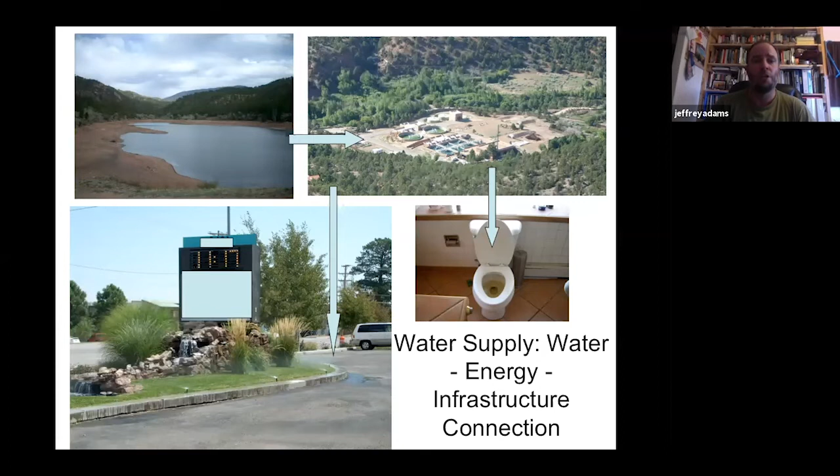At the same time as all those water supply connections going on, we also have this other phenomenon happen on a lot of our landscapes where, because we've graded our land, we've paved it, we've degraded it with overgrazing, overlogging, different suburban development patterns, whatever the underlying issues are, now when it does rain, it ends up mostly running off, often causing erosion and water quality impairments, and then leaving the upland areas dehydrated.

So now the areas that we need the water in these landscaped areas, we now need to tap into that other infrastructure intensive system to bring irrigation water to keep these spaces going, and then trying to mitigate the down gradient issues, whether it's flooding or erosion.

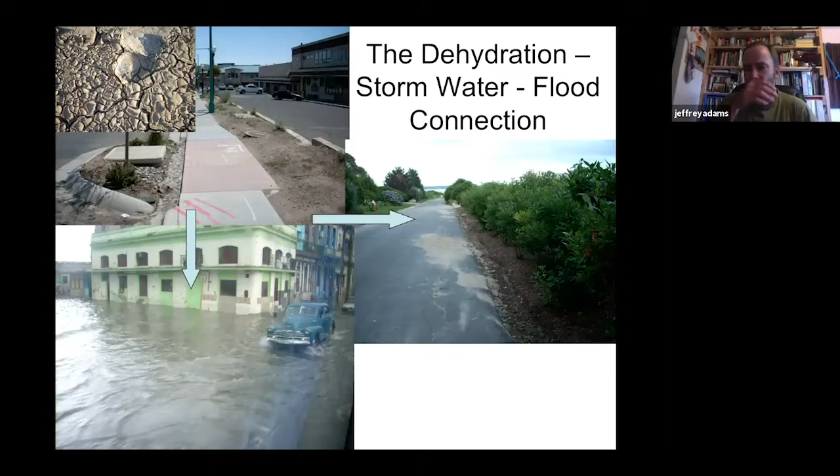And that all leads to a whole range of water quality impairments, and different localities have different quality impairments. Here locally in Moab, we have some issues with temperature, and that's partly shading of the creek, and we also have total dissolved solids and selenium and sometimes E. coli, and all of those can be linked to stormwater runoff. Some of that mineral is naturally occurring, and erosion is a natural process. It's just the scale and the pace of that is something that us humans have drastically increased in many situations.

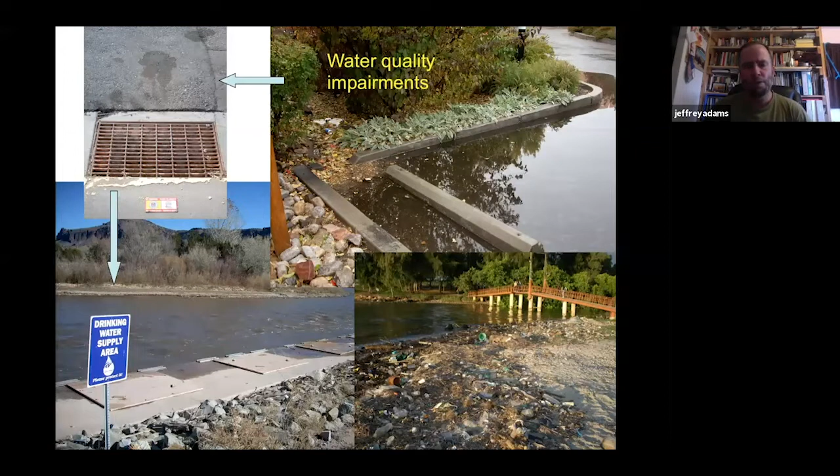Some other really practical reasons to the homeowner, to the building owner, to do water harvesting is to protect your buildings and infrastructure. If you look closely at the foundation of this house here, you can kind of notice that water staining of where water, no gutter, just sheets off. The patio is actually tilted back towards the house, so that water just sits up against the foundation of the house whenever it rains, just causing issues, causing damage. And then nearby, there is a shrub that has died because the irrigation that it was being provided probably wasn't enough, or some other factor.

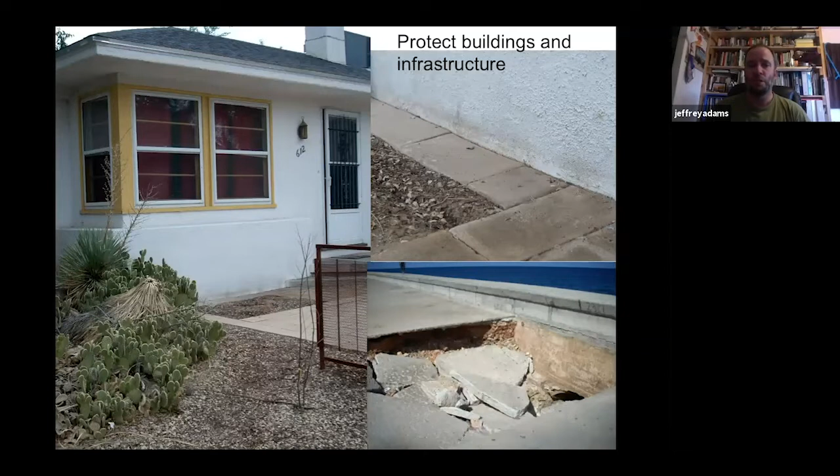And so if we start to connect these things and start to really look holistically, we can start to say, wow, I can turn this problem of this water causing damage to my building or eroding out the side of my road into an opportunity to put that water into a place where it can soak into the soil and feed the vegetation that we want to have growing.

So in general, unless it's a tree that's adapted, like a cottonwood or a willow, to have standing water right up against its trunk, we generally want to keep the root crown, right where the tree comes out of the soil and starts to become the trunk, we want that to stay high and dry, and then we want that water to be where the roots of the tree can just tap into it, so we're not damaging our landscape.

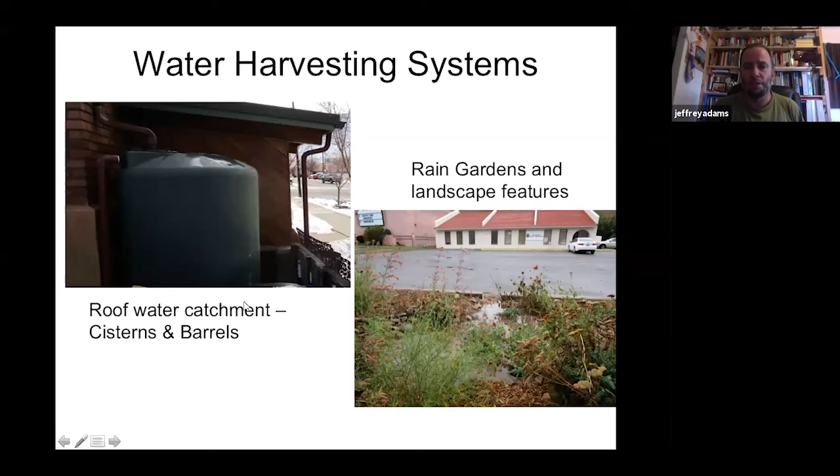So for both systems and for integrated water harvesting in general, you really want to start with a sense of place. Where are you? What are you working with? Because that's really going to drive what some of your opportunities are and what some of your other design considerations are going to turn into. So it really starts with climate. What are your patterns of precipitation? What's your annual rainfall? How is it distributed over the seasons?

What's your peak rainfall intensity, or the most you would typically expect in what the engineers would call the 100-year storm. And so we want to know some of this information from a water perspective, along with all of the other climate-based gardening info of climate zones, first and last frost dates, those sorts of things. But from a water harvesting perspective, we're really starting to look at, when does water come to me free from the sky that I might be able to put into use and work within my landscape?

And then the other huge layer is your site. What are your specific site conditions that you're working with? Where are your sources of runoff related to your gardens? How much water do you need? What type of plants do you currently have, and what type of plants do you want to have, and how much water do those need?

And so as we start to look at some of these together, that site assessment also starts to look at, what are your soils like? If you have heavy clay soils, you might want to do stuff that has a shallower ponding depth and is spread out over a wider area, versus if you have a loamy soil, you can fill it up more and it'll soak in a reasonable time frame.

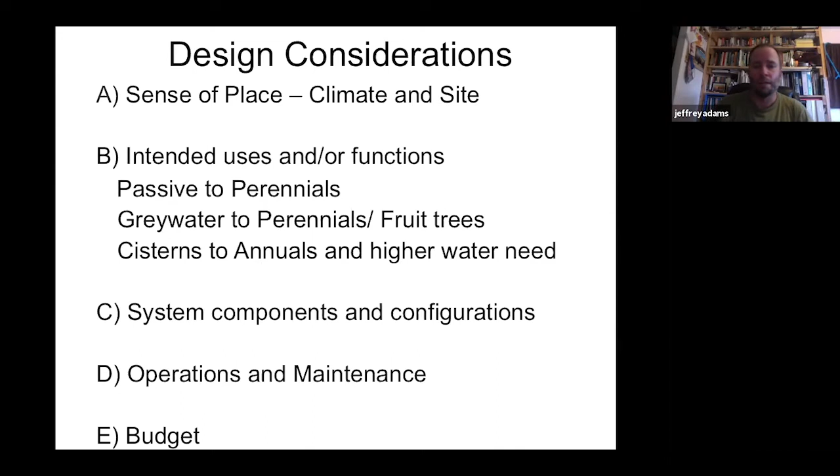So one of the key principles or concepts that I start with thinking about this stuff is the concept of a watershed. So at its classic definition, a watershed is a geographic area that drains to a common place, usually a river, an estuary, a bay, a lake, the ocean, something like that.

For the sake of water harvesting on our own properties and in our communities, we can really start looking at the sub-watersheds or the watersheds of a roof or our site, and that really helps us to hone in on, as these red arrows show, each place you have a downspout, there's a certain area of roof running to that downspout, and we'll get to do a tiny bit of math here in a second.

To calculate, we can say, oh, on this downspout A, in a 1-inch rain event, I get 500 gallons, and that information goes into how I size my tank and/or my earthworks. And then on the other downspout, oh, that one gets about 400 gallons.

And so we can start to break up our properties into these little drainage areas so that we can develop appropriate strategies for each watershed of our roof, or each watershed of our site, and start to match our sources of runoff, our roofs, our driveways, our steep slopes, any of those things, to our sinks, our places that we need that water. Where can we direct water that's running off of point A and send it over to where we need it in the landscape.

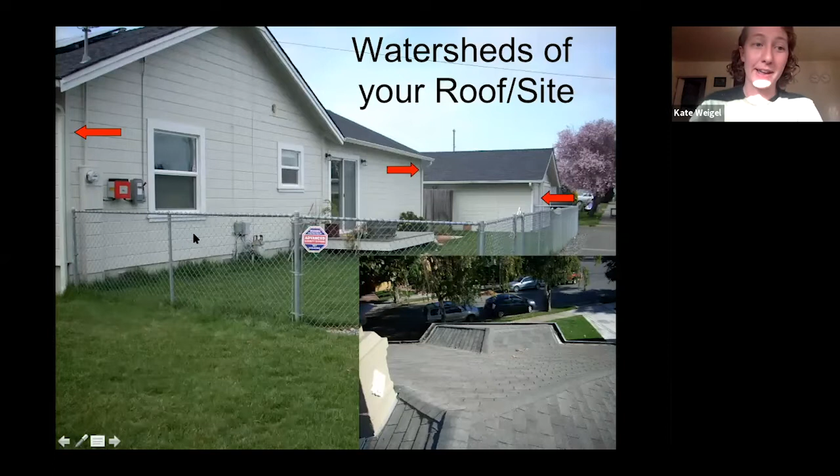Jeff, a question from a participant. What if there's no rain gutters or downspouts on the house? This is the case with my house, so I think this is a great question. Yeah, totally. So there's pros and cons to that. So that would be what we would generally refer to as sheet flow, meaning that that water comes evenly off the entire length of that roof area.

If you look closely, there's probably a splash area that might be a little bit indented and might have a little bit more rock showing right where that water comes off the roof and hits the ground, depending on what it lands on. So some of the strategies can be, first, there's the consideration of, is it worth putting a gutter on? Like, do you want to concentrate that water someplace that you can channel it to?

There's also ways you can shape the splash area that that water is landing on. I've seen people shape it and essentially put in a French drain type of thing, or even just a surface contouring. So when that water lands there, it starts moving in the direction that you want it. And that, of course, assumes that there's some slope. So the flatter your property is, the more challenging getting some of the elevations right are to move that water.

From a soil erosion standpoint, if guttering's not an option or not desired, you can even just put a layer of gravel, something to break up the impact of the raindrops so that they're not breaking apart your soil and causing it to splash on your house possibly, and then run off and erode.

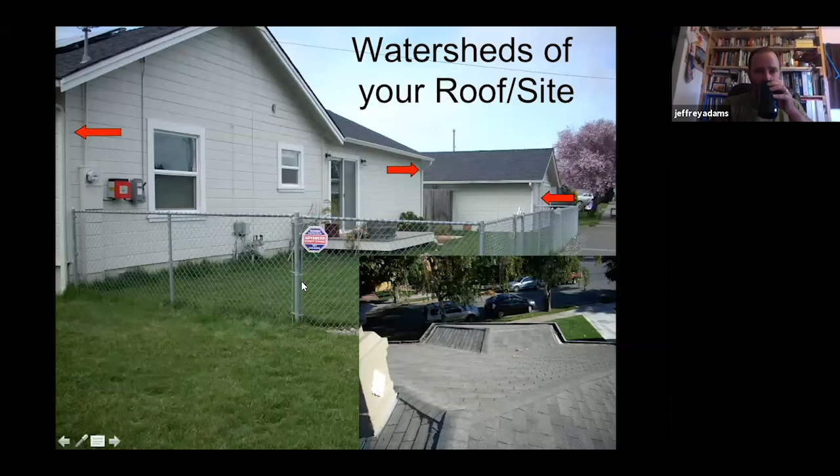So here's probably the funnest slide of the whole presentation. It's the one where we get to do math. I put this up because in a lot of ways, being able to quantify how much water, and these are estimates, it's not an exact science. The math is actually pretty exact in terms of converting to volumes, but the rainfalls that you receive in a given storm, and how quickly they come, or whether they come in multiple pulses, all that sort of stuff is going to be a lot more variable.

But this can give you a sense of, and it holds true for any surface, whether it's your roof, your driveway, your garden, the parking lot next door. You can use this to get an estimate of how much water you can reasonably expect from that surface in different size rain events and over the course of the average rain year. And so the formula is pretty straightforward. It's the area, so in square feet, so that's just your length times your width.

For a house, even, you've got a sloped roof, but you'd look as if you're looking down just at the footprint of it, because that rain generally is falling pretty straight down. Of course, the wind blows it too, but for the purposes of this calculation, it's the bird's eye view footprint of the surface in square feet times the inches of rain you want to solve for. I usually start with 1 inch of rain because it's easy math and it gives us a good sense.

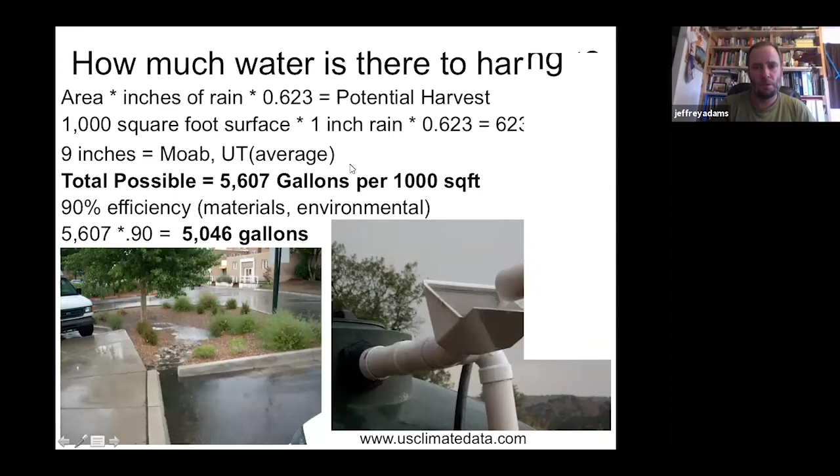So now to look in a little bit more detail at some of the different techniques that fall under this passive category, this earthworks, rain gardens category. I'd refer everybody to what I think is probably the most comprehensive resource out there, Brad Lancaster's Rainwater Harvesting for Drylands, volumes 1 and 2. I listed 2 here because it gets into a little bit more of the technical details, whereas volume 1 is a little bit more of the theory and principles and bigger picture stuff, but they're both incredibly good reads.

And then I would also recommend people look at some of the stuff that the Watershed Management Group has. They're out of Tucson, Arizona, and they've been doing a huge amount of work and innovation in these fields for a bunch of years now.

So above the line, basins, berms, swales, terraces, and we could think of some other terms that would fit in this technique list too, but those essentially refer to different ways of physically shaping the land to be able to hold on to some amount of water. And then below the line, the healthy soils, mulch, and vegetation, those are really the biological components that end up driving the system and making it function properly over time.

And really a primary goal of all of this is to build healthy soils and to turn as much of your landscape into a sponge that can soak up, hold on to, and slowly release that moisture and any associated nutrients over time. And then mulch is essential for helping to feed the soil. It's good for weed suppression, and it also helps to minimize evaporative losses, meaning as the sun and the wind go over a soil surface or pass through plants, some amount of water is lost through that.

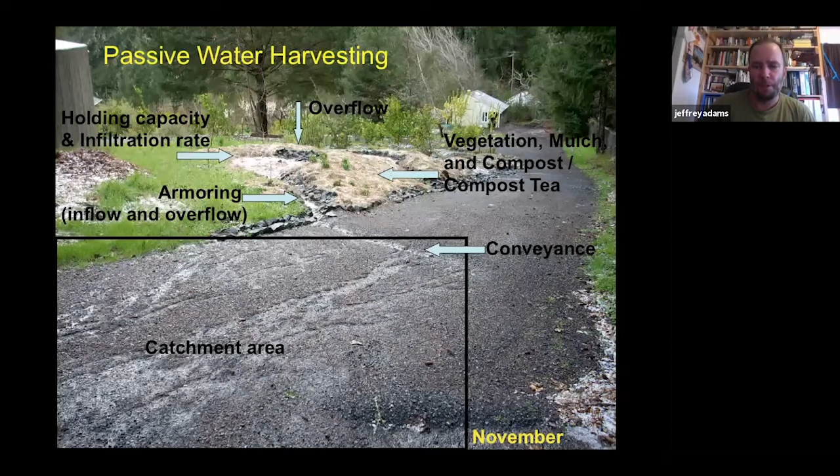It works pretty good. But there it is in November, and then the following summer, after a wet California Mediterranean winter, so different in each climate, but we've had similar results to this here in Moab. We just typically need to provide more supplemental irrigation than in some of the wetter climates. But that's kind of the premise.

And then the species we choose is really up to the individual designer and property owner. My preference is often multifunctional stuff, ideally things that I can eat or get culinary or medicinal herbs from, and then also tons of flowers and pollinator plants. And it's nice to put in shrub thickets for bird habitat and really start to turn our landscape into both part of our infrastructure, but also an ecosystem of itself.

As we get more of these distributed capacity water harvesting ecosystems, we can really start to have cumulative positive impacts at a neighborhood or a community scale in terms of things like drought resilience, pollinator habitat, food production, stormwater management, water quality, localized flooding, these different issues that a lot of communities and neighborhoods face. And not that this is a silver bullet and will solve all of those every time, all the time, but it's a major part of our packet of solutions.

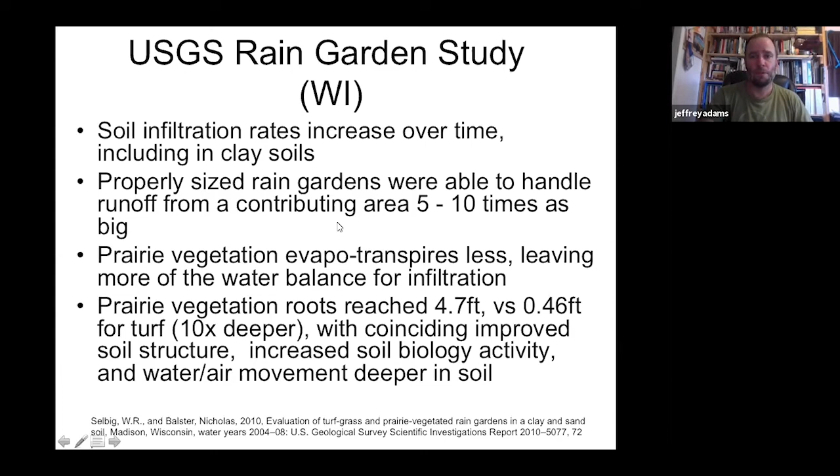So then there's berms. So that's kind of where a basin is, you're indenting into the ground. A berm is you're building up off of the surface of the ground. And where those come in is sometimes you just don't want to dig. Sometimes you have root systems or infrastructure or shallow bedrock or some number of reasons that you may not want to dig down, but you still want the function of being able to create a physical structure that causes some amount of water to pool up and soak into the soil.

It can also be very useful if you're trying to get some additional plant height, in terms of creating a windbreak or a privacy berm. Sometimes it's nice to get 1 foot or 2 or 4 feet of earthen berm up to then put your plants on top of, so that they start up higher and it takes less time for them to provide some of those other windbreak privacy functions.

This particular set of pictures is a colleague of mine in New Mexico, Christian Miley, and he has been doing pinyon juniper thinning and re-veg for a number of years. And what he's come up with is he does the thinning both for forest health and for fire hazard reduction, chips that material, and then makes these approximately 1 foot high, 1 foot wide berms on contour with the wood chips. And these would be in areas where it's low flow energy.

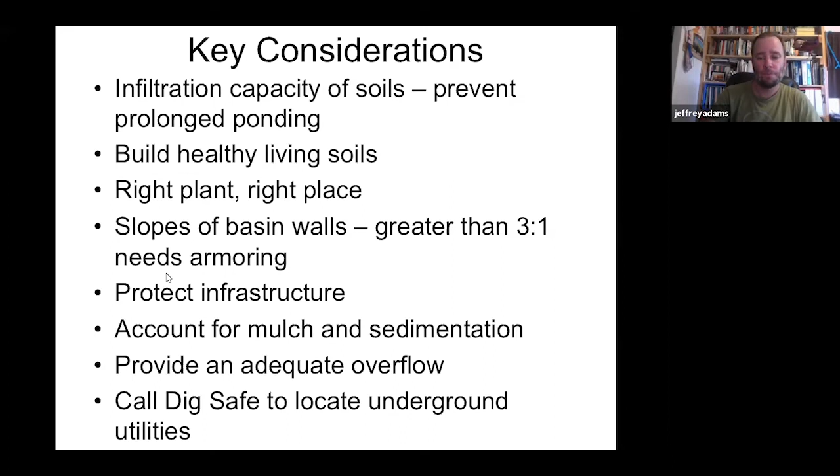We have a couple more questions. All right.

So one of the questions is, if there is soil erosion around the house structure, should I just add the small gravel on top, or should I add soil there and then gravel? Honestly, that depends on your finish grade. In general, you'll have the baseboards of your house, whatever stem wall or concrete footer, and you usually want about 4 to 6 inches between your soil grade and the bottom of the trim or the walls of your house. So it kind of depends on where you are in that.

If you're a foot low, then yeah, bring it back up. But if your grade started out high, then it might even be that you carve a little bit more away and then put down the gravel. So it depends, but that 6 inch gap from finish soil grade to bottom of house is a pretty good rule of thumb for deciding on that one. And then another question: do you put the berm or swale on the high point or the low point? So finding the level spot all the way across, is that correct? Yeah, good question.

So essentially you want your berm, and then your water harvesting, it could be a swale if it's below grade, but the bulk of the earth is going to be on the downhill side. Your water harvesting that you want level is going to be just up from that, and then you want the top of your berm, or usually when you dig a swale, you're creating a little berm on the downhill side with that dugout material.

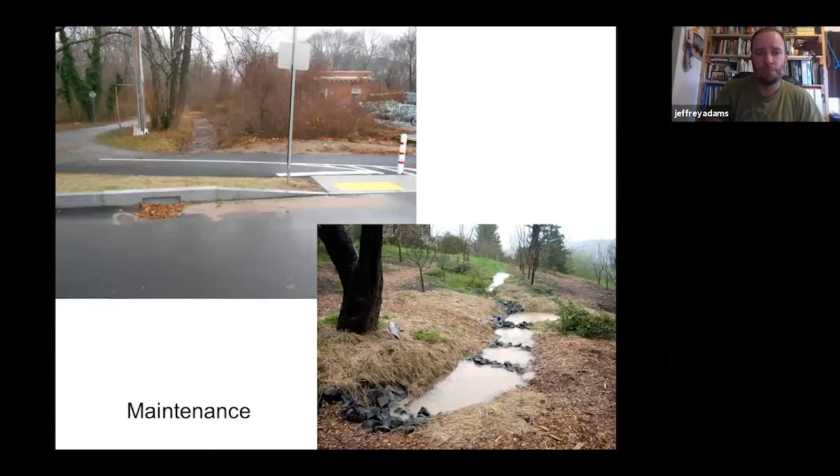So then there's also some challenging site conditions where it may not be appropriate to do passive water harvesting. That could be really steep and unstable slopes, if you're in an area that has dissolvable soils that could form a sinkhole, or expansive soils that could cause some shifting. Areas with really high groundwater within a couple feet of the surface, there just might not be enough soil volume to soak that water in before it hits the groundwater. Same with shallow bedrock or a low permeability area.

Areas of heavy compaction, that's a little bit easier with a machine, or if it's small enough, a broad fork, you can loosen some of that, but it poses a little extra challenge. And then polluted areas and brownfields, we don't want to add a bunch of water onto polluted soils and potentially push that pollution down into an aquatic system. So just some things to keep in mind.

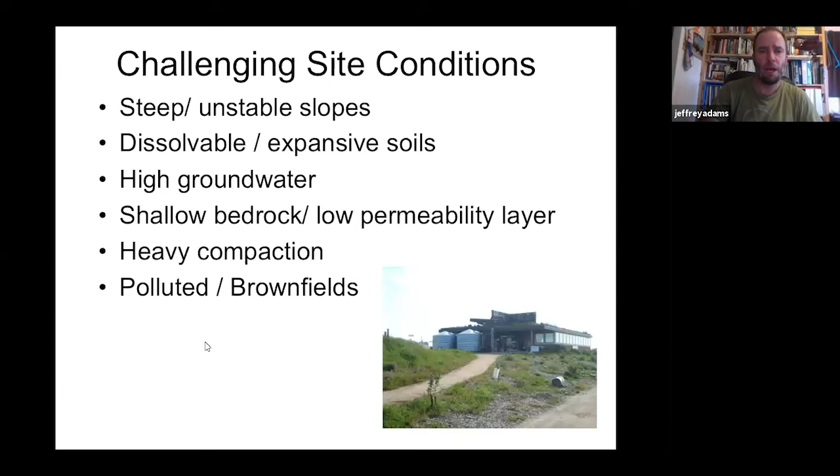There's just a picture of a curb cut with some pretty dirty looking stormwater running into it. And then here's a property I've been working on outside of Moab for the past, I think this is year 6 now, 5 or 6.

And when I started working there, they had in this top left picture a 100% code approved, engineered, designed and stamped detention basin that was sized to meet the needs of the site, and is essentially this big old pit in the ground with an emergency spillway, and you can't quite see it in the picture, but there's an 8-inch pipe that goes out the bottom.

And that pipe drains, if you look at the bottom right picture, so all the runoff from this barn and some of the gravel utility areas around it would go into this basin, and it would come out the 8-inch pipe, and it was carving this gully straight down the middle of the property after just a couple seasons. And then it was going over this big embankment down to the creek, which was starting to head cut and really blow things apart. And so I got brought in to see what we could do from a permaculture perspective.

And what we came up with was, it's hard to see in this picture, the next one will show it a little bit better, but this is that same angle. We were able to get code approval and have that same engineer stamp the distributed basins that I put in here to show that they had the same volume, and this organization was able to fill in that big detention basin and start to use it as part of their activity areas for the groups they have here. And we were able to start to re-veg and manage that stormwater.

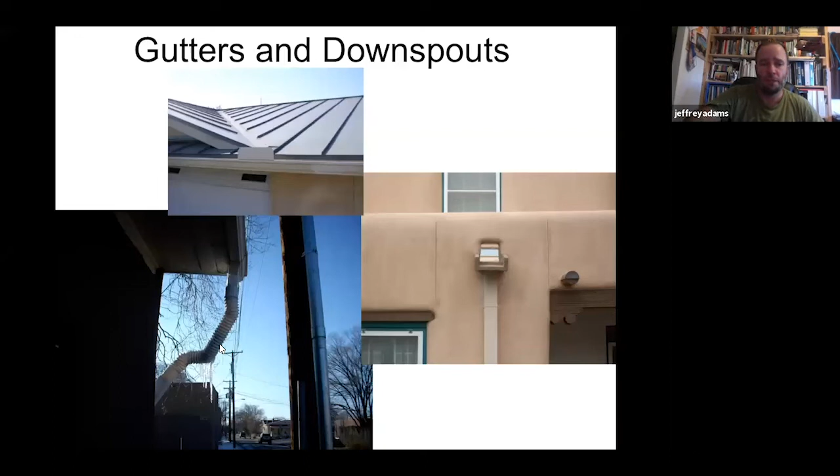Living roofs, all the rage. Living gutters, not so cool. And so any house that has gutters, it's a potential maintenance issue to just keep those free and clear of debris, especially if you want to store that water in a tank for later.

Here's a couple options of the pre-filters. So the upper left is that debris excluder. It's really nice because it's there, visible. You can put it at eye level or whatever, and it's slanted, so some amount of the debris naturally sloughs off, but you can walk by and see it and say, oh, I gotta clean that off, and tap it off real quick, as just kind of a part of walking by things.

And the bottom right is a basket strainer. That's often used for a lot of underground tanks, but it can also be used for above ground, and they sit inside the top of the rain tank, and then the water comes in, like in that last picture here. You could put that basket filter right in there and then have that water come in that way.

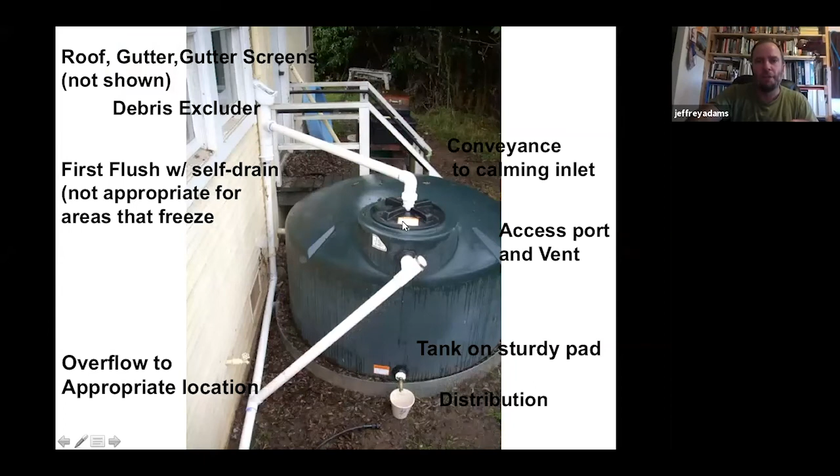Those are kind of two of the most common options. There's some other products available, but those are the two general types of pre-filters. And that's just a really important thing: good quality water going in is better quality water coming out.

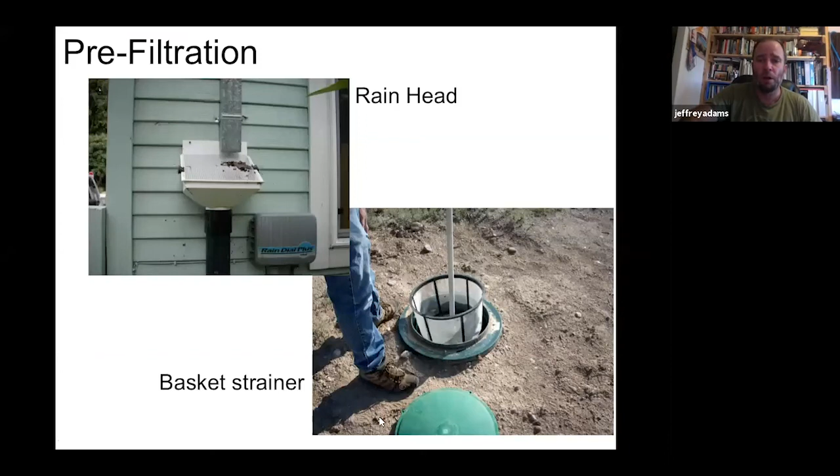And so here's just a couple different tanks. Dry conveyance, essentially this pipe drains dry after the rain is done, so there's no chance of that freezing. In warmer climates, you can do what's called a wet conveyance system, where you use the self-leveling properties of water to actually move water down across an area and back up, but not appropriate for areas that freeze. So I've stopped including that in a lot of my presentations, but just know that that option is available if you're in an area that's not prone to freezing.

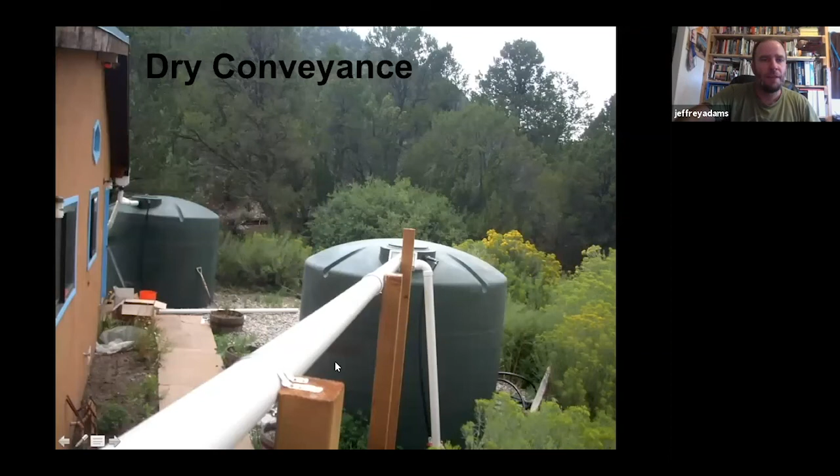And then tank types, these polypropylene are the most common types, and those ones that are made to be buried, and then all different sizes and shapes for above ground. The bottom right is the USU Moab permaculture campus, where they've got these slimline tanks doing some roof water catchment that feeds into their rain gardens. And so there's a whole range of sizes and volumes that you can look into to really customize your need.

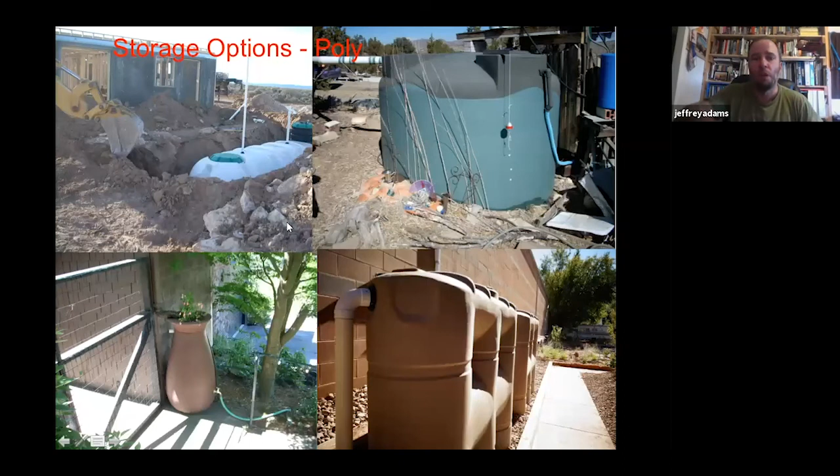The one word of caution is that if your tank is not rated to be buried, it's not recommended to bury it, because like this upper right tank, those walls are flimsy. They're not designed to have any soil loading on them, where this upper left tank is designed to be buried and has ribs and is engineered to withstand up to 3 feet of soil on it.

Then there's also different corrugated metal tanks. They usually have a liner on the inside so that the rainwater is not corroding the metal, but there's a bunch of different sizes and shapes of those. And then you can also make your own concrete or ferro cement tanks. And especially in larger volumes for some of the bigger commercial projects, there's different fiberglass tanks as well.

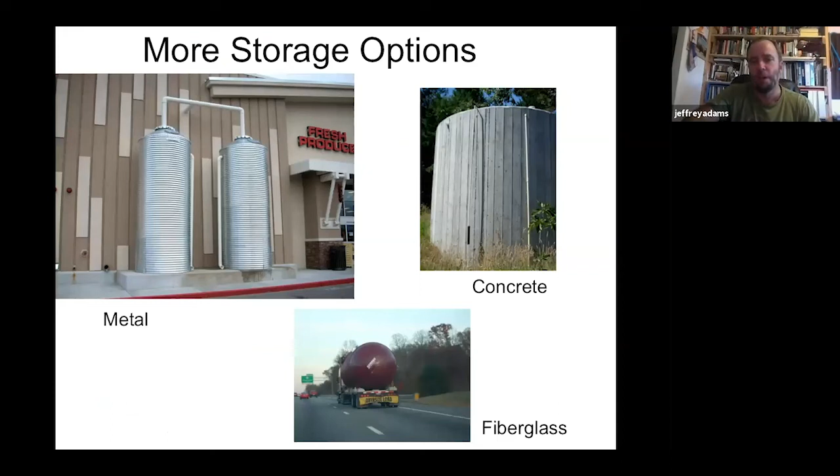For underground stuff, again, making sure it's rated to be buried. You've got to have your access to be able to get in there and service and maintain it, and you want that above grade, so you're not getting water flowing into it. You've got to overflow to daylight, and then you've got to bury the bottom of the tank and all of the pipes below your frost depth, and then rated for whatever loads.

They do make some that you can drive and park on, and others that you can only pile a certain volume of soil. And if you have high groundwater, you might need to use what's called dead men to prevent it from essentially popping out of the soil due to the buoyancy.

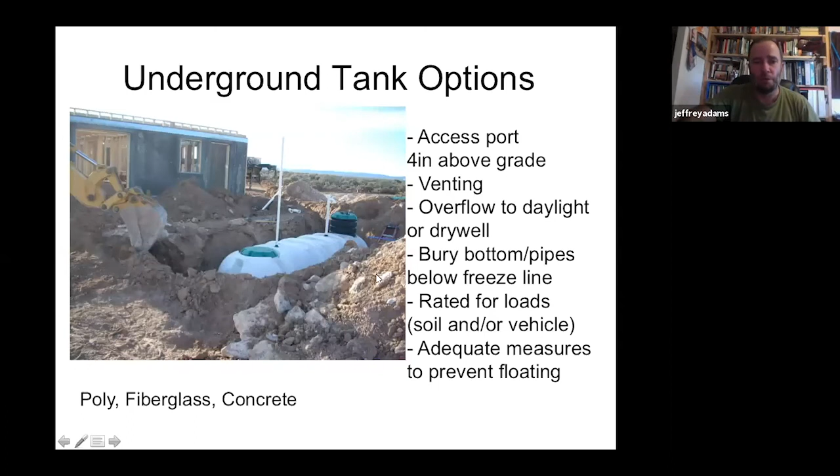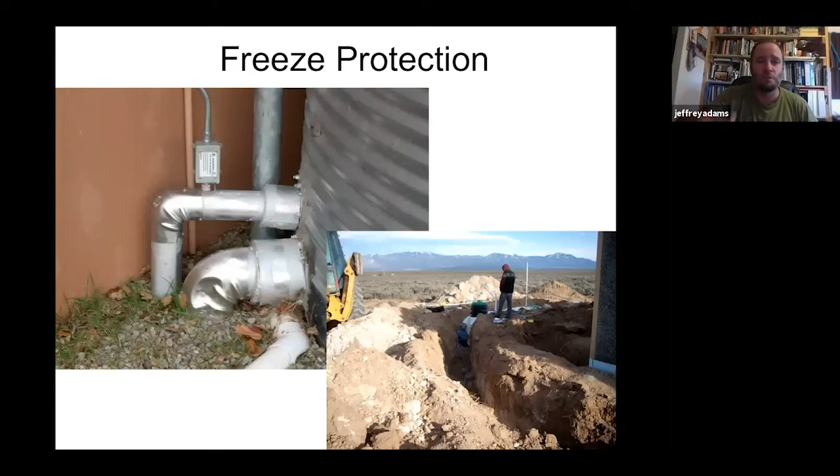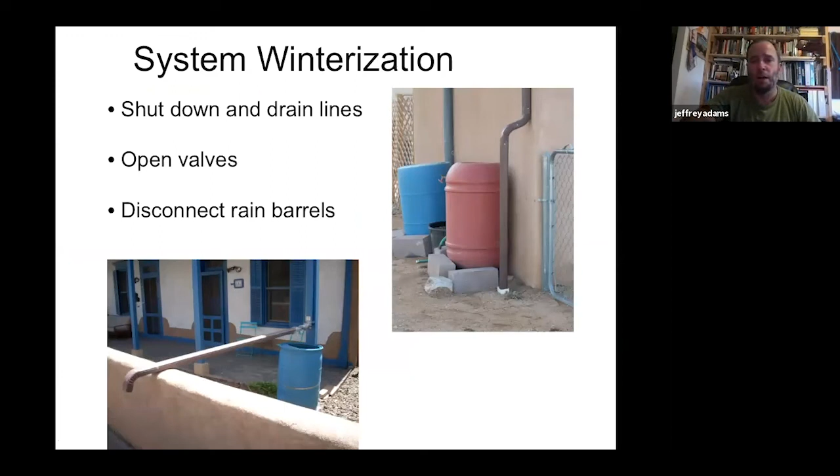Some different frost protection: heat tape is one option, burying stuff below frost depth. Sometimes people just disconnect their system in the winter and direct it straight into a rain garden. So there's pros and cons to all of those, and it's going to be a situational thing. And so here's examples of just disconnecting these rain barrels and putting that water into the existing stormwater management system or out into a rain garden. And that can be done opening valves or just fully disconnecting them.

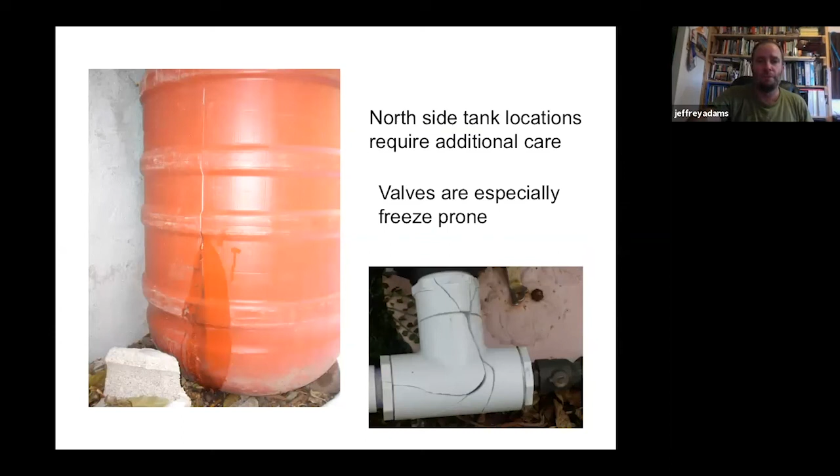And there's one that wasn't disconnected, and it actually split at this seam because it was on a north side of a building and just froze and popped the tank open. And same with your fittings, and your outlet valve at the bottom of your tank is generally going to be your most susceptible to freeze damage, so just pay attention to that.

And then yeah, the overflow's got to be the same size or bigger than all of your inflow piping, because you don't want to have a big pipe coming in and a little pipe coming out that can't move all the water, and then it backs up or it bubbles out the top.

Everything should be screened for vector control, so often just using window screening so that no mice and especially no mosquitoes and other bugs can get into your tank. And then depending on where you are, that might fall into stormwater discharge regulations, so you might be required to do some additional retention on site. But in general, you really want to look at that overflow as the resource it is.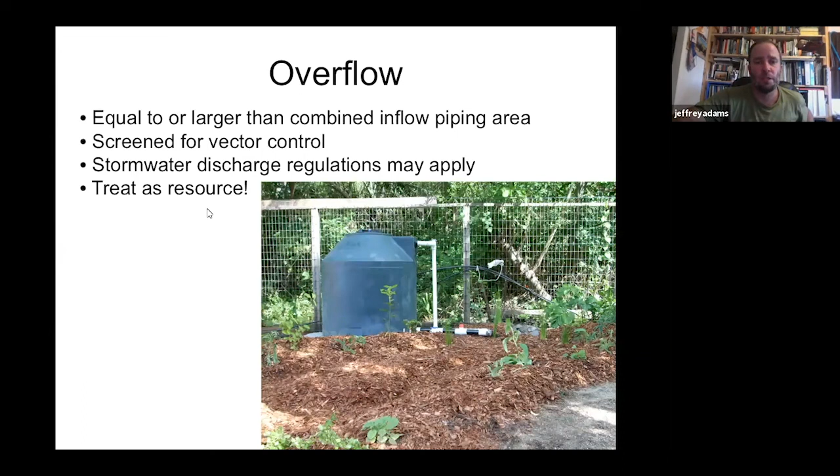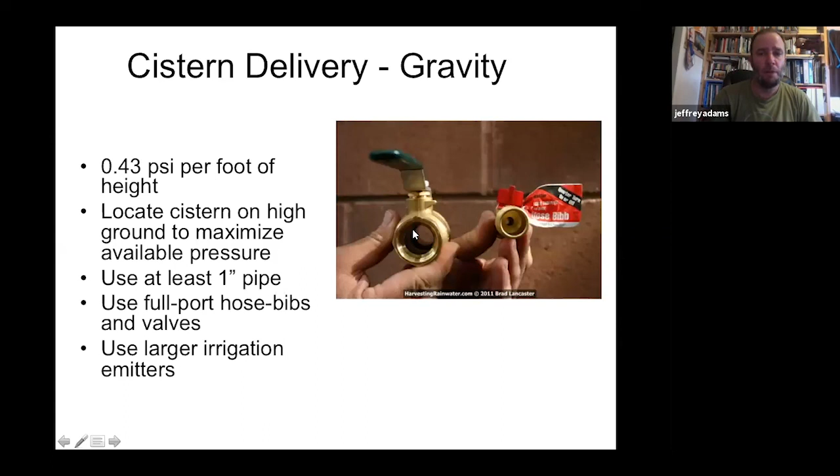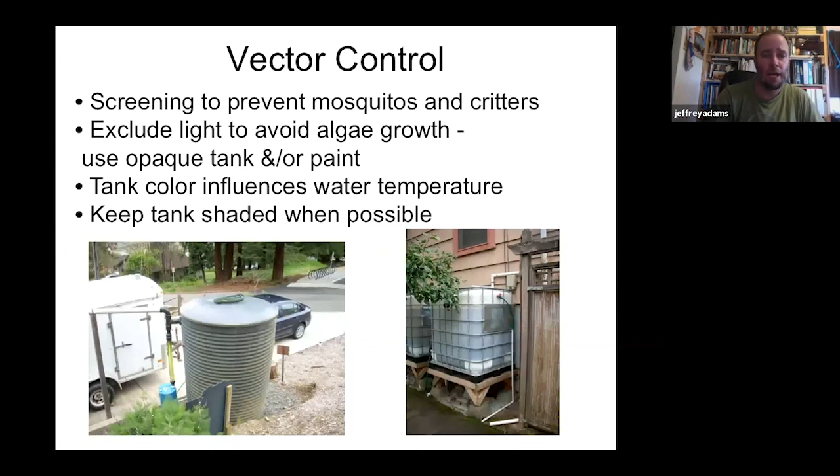And pumps, I'm not going to really get into those in this, that's beyond this, but just some general vector control stuff to consider is that screening for mosquitoes. You really want to exclude light. So if you use some of these IBC totes, it's highly recommended to paint them or put some boards or something around them, because you can see the dark color of that water on the right, and that's a combination of both leaf and organic debris getting in, but then also that light coming in and growing algae that just decreases the system, gunks things up, can have a foul smell, things like that. So just kind of some best practices to keep in mind.

And then I often like to think a lot about scaling up. Every single rain garden, every single rain barrel, every rain tank is a really valuable piece of infrastructure for a site and a community. But the real magic, I think, happens when we can start achieving this at scale and getting just hundreds of applications all throughout a watershed. And that takes outreach and education. It takes getting demonstration projects where it starts to just be what people see and notice as they go about their day and get new ideas from. There can be lots of room for neighborhood collaborations, perma-blitzes, neighbors helping each other dig their rain gardens so that it's more fun and more productive.

In the past, I've been involved in some bulk purchasing of tanks, because a lot of times the delivery is a big expense. So if one person's getting a tank and paying the full delivery cost versus if 5 or 10 people are getting tanks and sharing that delivery cost, it can really help make some of the tank systems more cost effective. And then there's also just opportunities to get some of these things into our policies and ordinances. It currently is legal to catch rainwater in Utah. I meant to say that earlier, but you're legally allowed to have up to 2,500 gallons of roof water catchment tanks per parcel. And then there's a simple free registration that you would do with the Division of Water Rights that essentially just says, hey, I have 1,000 gallons of rainwater.